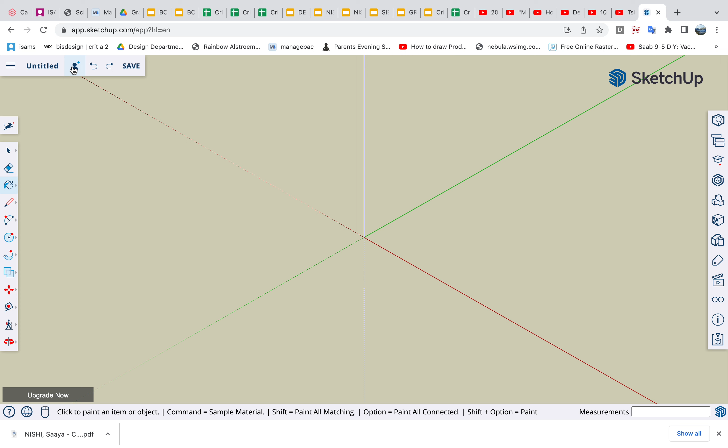Go for a simple, elegant bottle. A few tips: go to the top, and when you go to create new, make sure it's in millimeters.

Click on a line, this will help. Go up to the blue axis, and just type in the bottom. Go ahead and type straight away 2000. I know it's a massive bottle, but believe me, it will help you a bit later on.

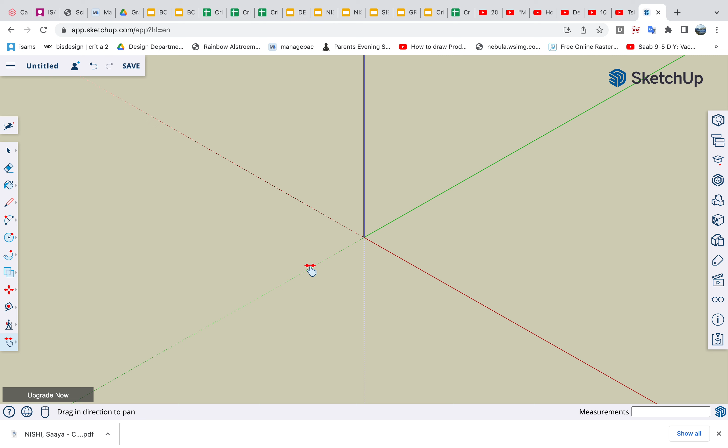So let's pan this down into the corner, and then we can see the top of the bottle. Nip over here, press escape, and change your views. I'm going to go for a fully isometric view, and look at the front.

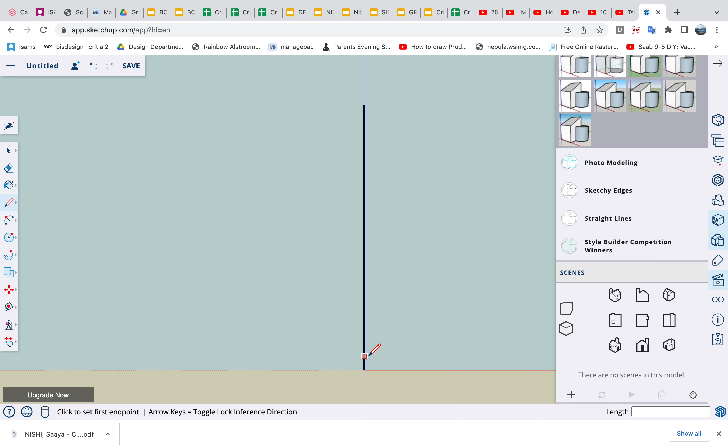So the horizon's at the bottom where the origin point is here. Go up to the top of the bottle, and you're just going to draw. I'm just going to draw a basic lid.

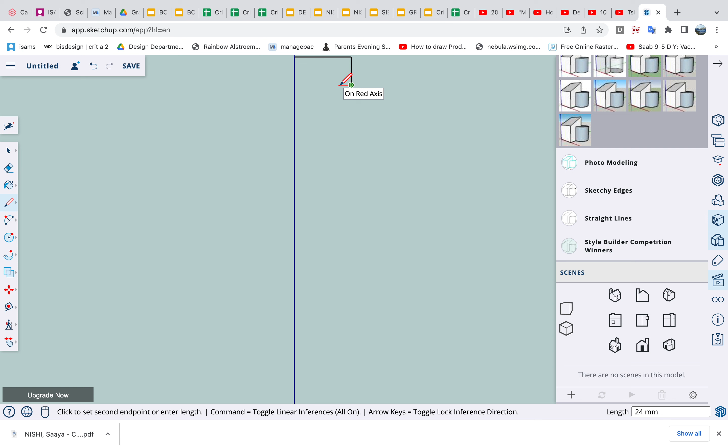You start to draw your design, but you have to think about things before you start. So I got the top of the lid, and I've got this simple screw-on lid that you find on many of these, and then underneath you can draw where the neck is, and then draw another line.

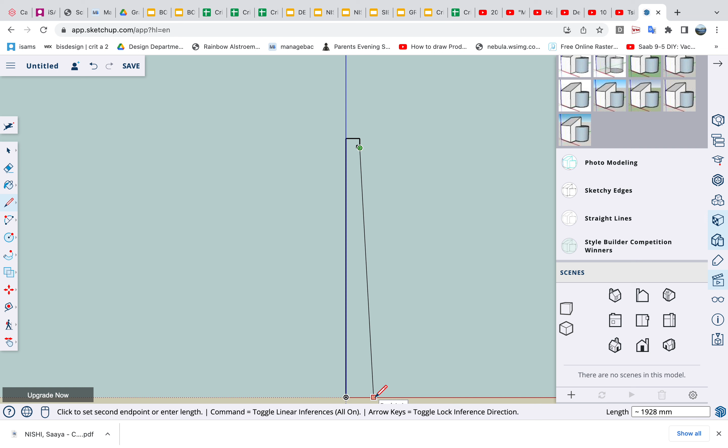I'm just literally going to go all the way down to the bottom, click on the origin, and then drag so that it says red axis. Just click on there, and then I've got this line, and then just fill it, click just there.

So I've got this profile that I want, but there's some problems with this. Use the pan, and then come to the top. Right, this is a sharp edge here, so get rid of it.

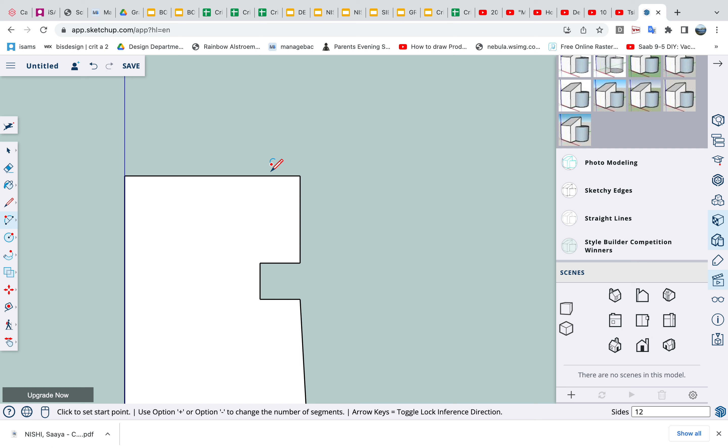Click the second one down, and then click on the edge, drag it to the edge until it turns pink. The line and the arc in the middle, it says tangent to edge, and then just click, and then click again, and that should have gone.

You could always use T for trim. Sorry, use the rubber tool and just take out that line there and there. It should have done it anyway.

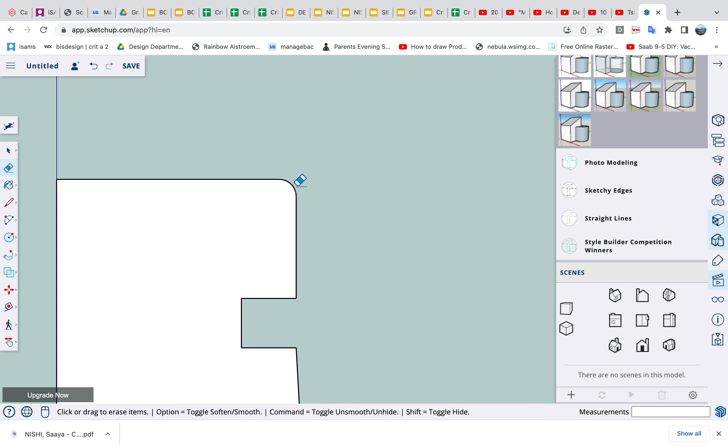And then use the same arc tool, and I might just put one. No, I'm not going to put one there. So I'm going to put one here. Click, click, and then double click. That's it, double click, and it trims it straight away.

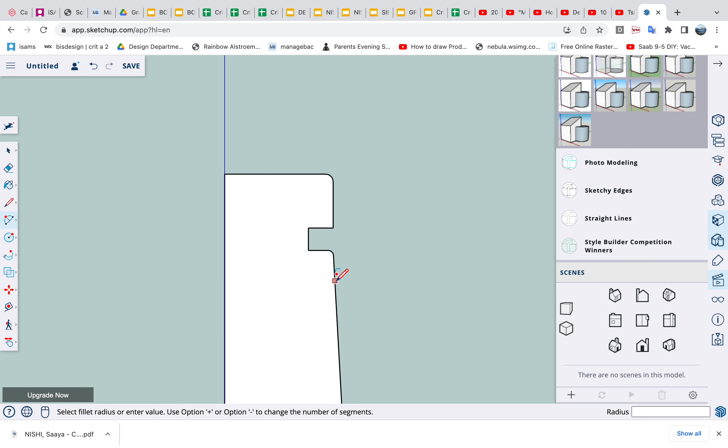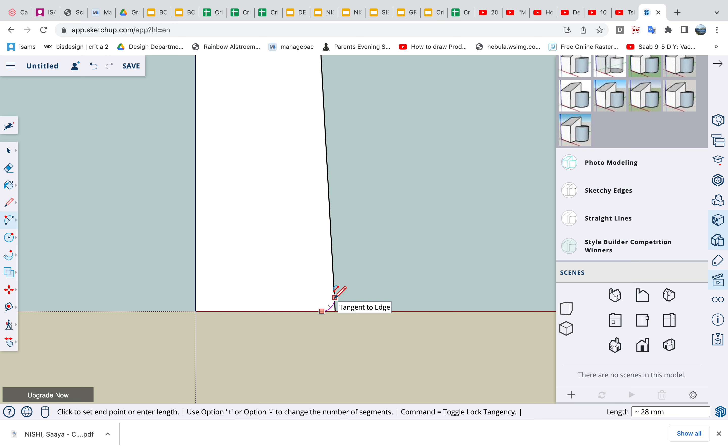The next bit is the bottom of the glass. And the bottom of the glass here, I need to do a nice radius on that edge as well. I'm trying to do this quick, under 5 minutes. So use the radius tool again. Click, click, double click, and it puts you a nice little edge radius on there.

So now I've got this really tall, skinny, slim bottle. It's probably a bit too tall, that's all right. So now what I need to do is, in order to make it round, I've got to use this tool here, offset. Click on this line and then just offset it.

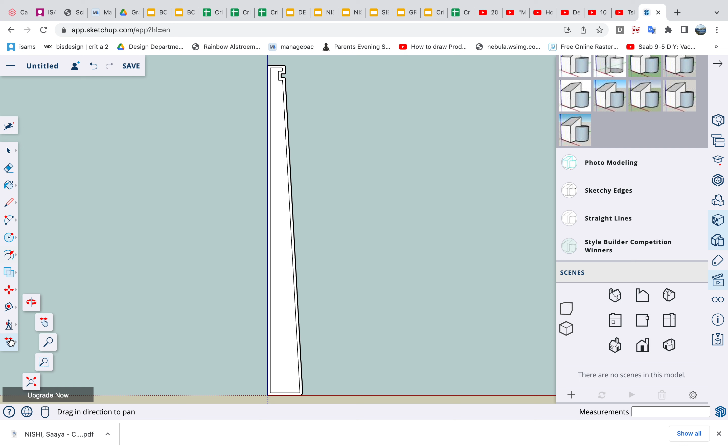Perfect. And then let's go pan and then zoom in at the bottom. So the best thing to do here is then use a line, and then we're going to put another one here.

I think this one works best, but we'll try that one there, and then zoom out.

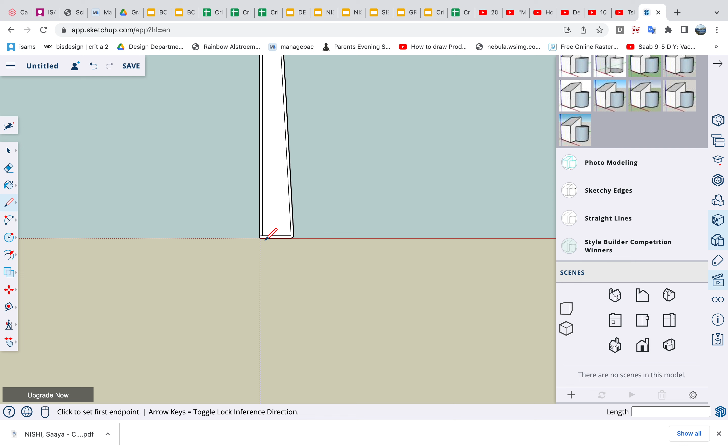And then go all the way to the top. Come on. Then zoom in, and then put another line, escape, and then put another line across there. And then use your erase tool to take out this line and this one. So it leaves you with the outside profile all the way around.

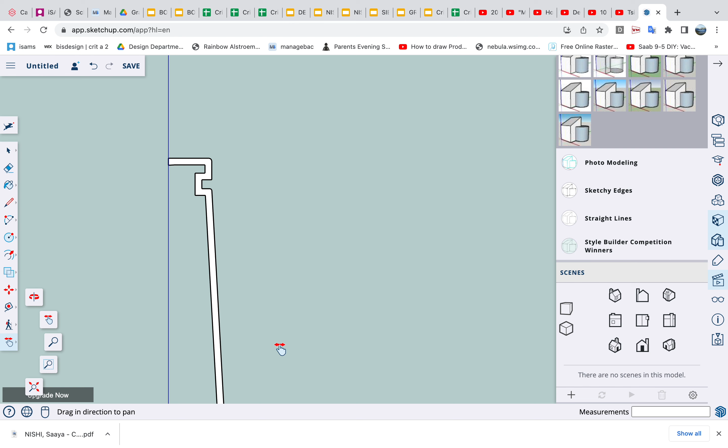See that? Good. Then press your home. So there we are, we're all home. And then just zoom out so that you've got this profile that goes all the way around.

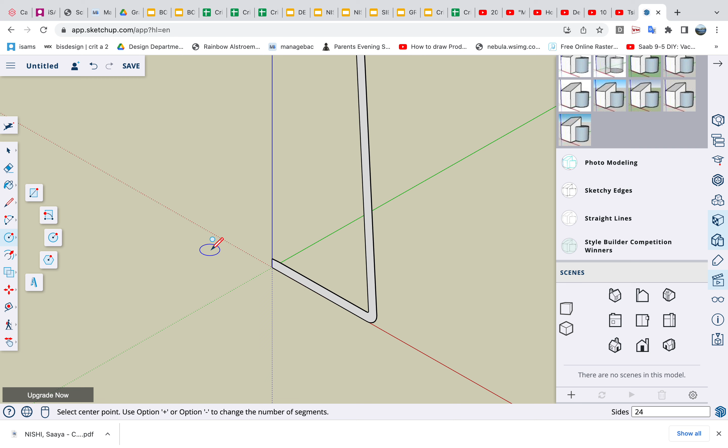Next thing to do is just to zoom into the bottom a little bit. And there you go, get that central. Hit circle, and then click on the blue axis. Make sure this starts on the blue. So click on the blue and then just pull that out.

Probably, I think that point there, that should be okay. Now it might go wrong, and you can correct it.

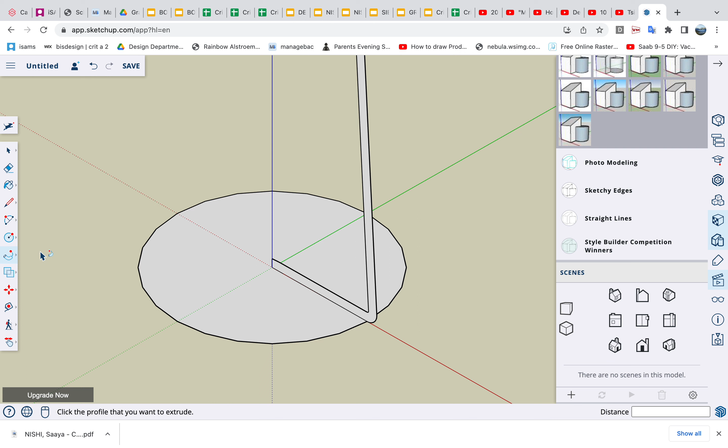So underneath here is the follow me tool. Click on follow me, click on this profile, and then actually click on the segment itself, and then just keep following the segment round. Hover the button all the way. Keep going.

Until you get all the way back here. Now this is the awkward bit. On the edge, click. Now I've done that slightly wrong because there's a line and there shouldn't be. So Command Z, if it gets a bit fiddly, go back the other way and let's just see what happens.

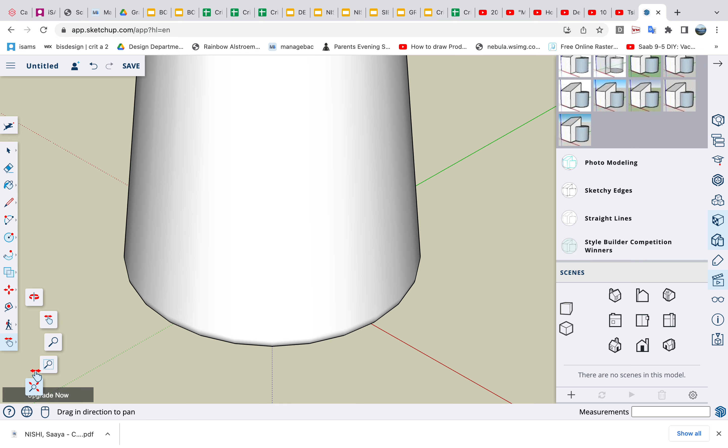Sometimes it gets a bit funny. Yay, there you go. And then what can happen is, depends on how it's working today, is underneath it can be hollow. Hooray! So let's try and fix that too.

C for circle. Click on the blue axis and then drag that out until you're on a point. Click, and then you can use P for push pull and just drag that up to the line there. Is that going to go up?

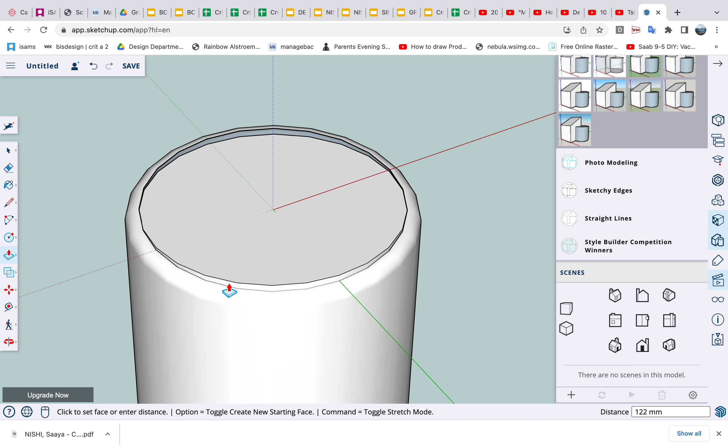No. So Command Z. Let's try that C for circle again. Circle from the center. Careful which point. Origin. There you go. Right on that edge.

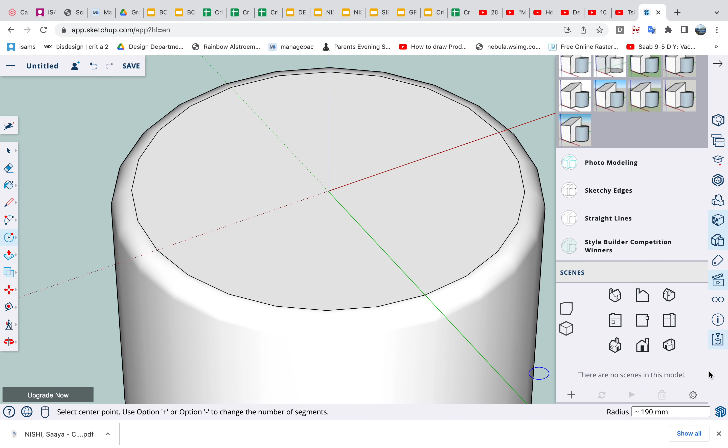Yeah, there you go. So that's now filled. So turn it over. And now, we've got this bottle shape. Okay, so let's just use the pan. Let's bring that one down. And in we go. So now we've got this quite sleek, slender bottle, posh bottle.

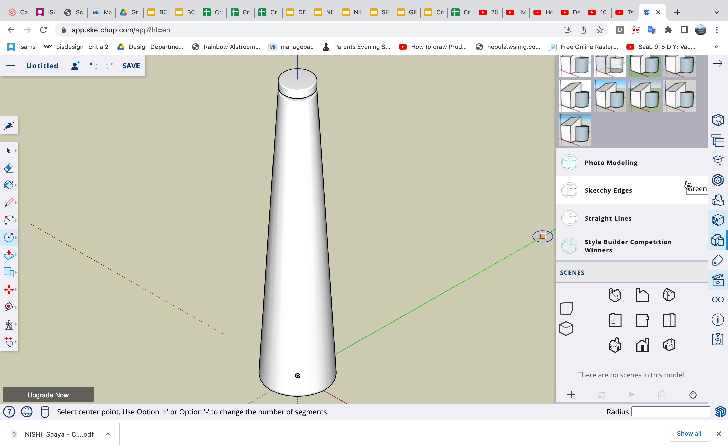Now, you would want to now give it some colour. So go to this palette here, and to get there, you'll be here. So go onto the search tool. So if I want to give this a nice light colour, I click on there and then drop that onto

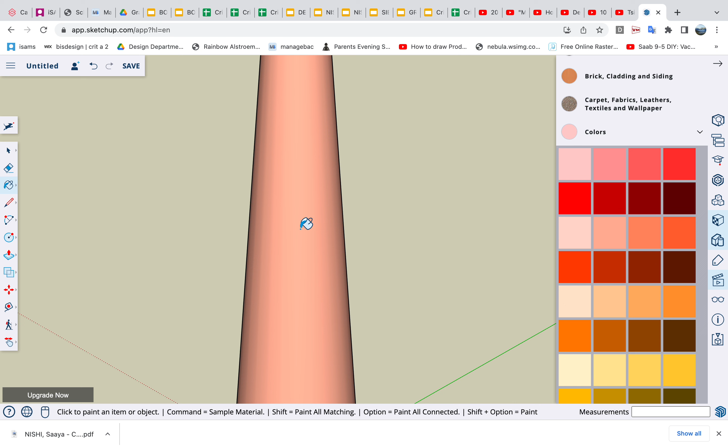the colour here. Now, if you want to give the top a slightly different colour, you're going to have to zoom in and then just use the pan and then zoom in. And then if you wanted to go for a different colour, let's say a much darker colour, then drop it onto here.

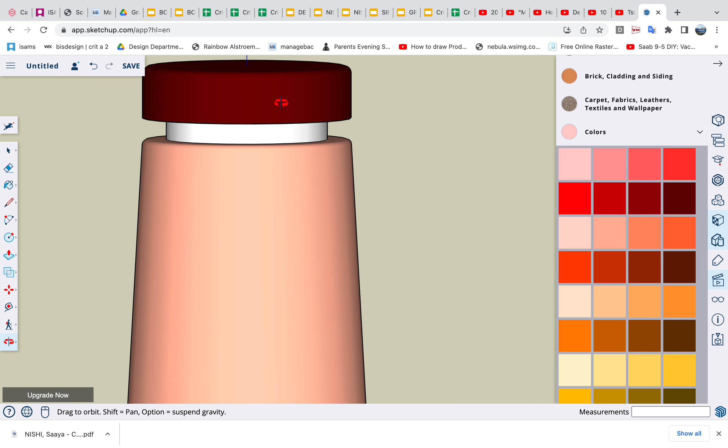And then what you want to do is you want to actually then turn that over, and you probably want to do it on the underneath as well. Escape and then drop it onto that underneath surface. Let's just leave that white, or let's just go for a different colour anyway. So we put it on the neck, a slightly different colour. There we go.

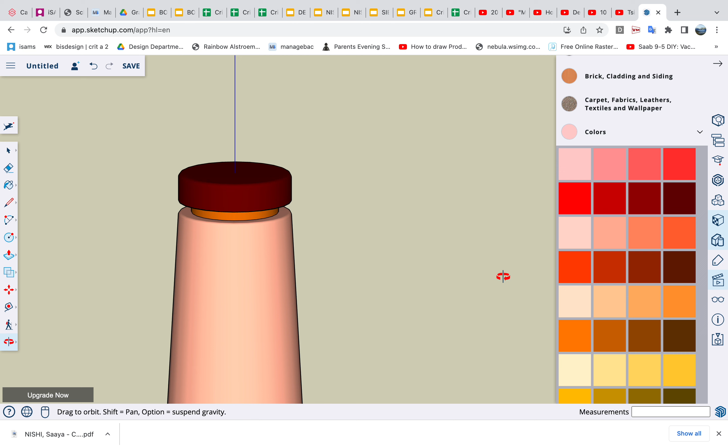So what to do next then? Well, we'd like to show it as see-through. It gives a better effect. So go to your clapperboard and we're going to put it back onto, where's that gone?

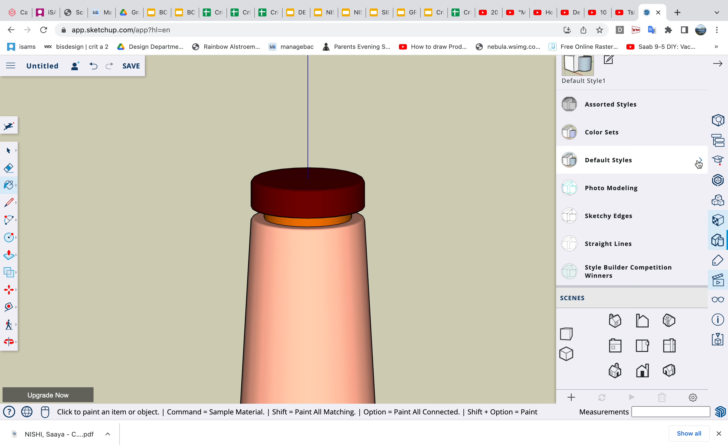We're going to put that back onto perspective. No, we're not. We'll leave it on there for a minute. Go to your default style. So go onto here, and then you've got this. I'll work that back for you because yours will be on home, and you can then go to search and then go to default styles and go for X-ray.

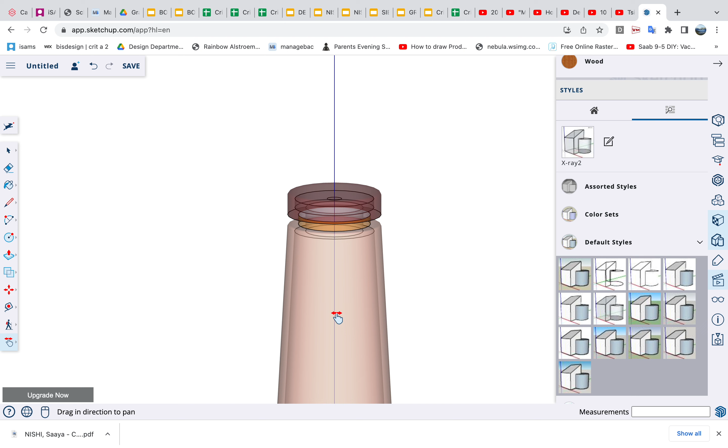So what that does is it makes the bottle look see-through. So just use your pan and you can see, look, bring that up, the whole bottle looks slightly see-through, okay, which is the kind of thing that we want.

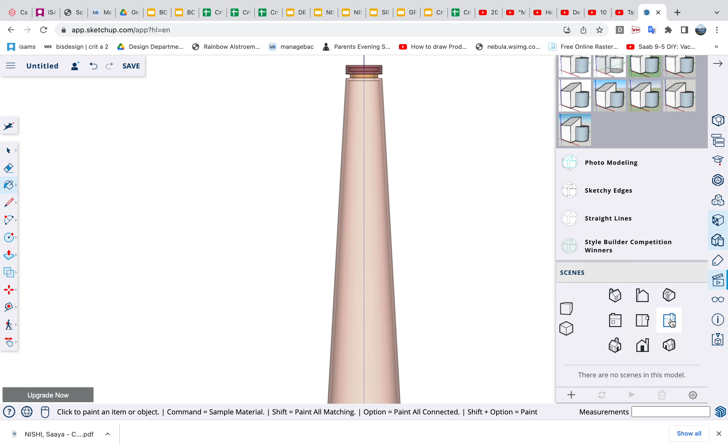So in the end you'll have a 3D view, and then you'll have a front view, then you'll have a side view, and then you'll have a plan view from the top. And this is where you can apply your logos, and I'll show you how to do these a bit later on. Hope that helps. Let me just put that back to normal.

Yay, just on that one. So that's how you do your basic bottle. And you can put it onto there if you want a better 3D view.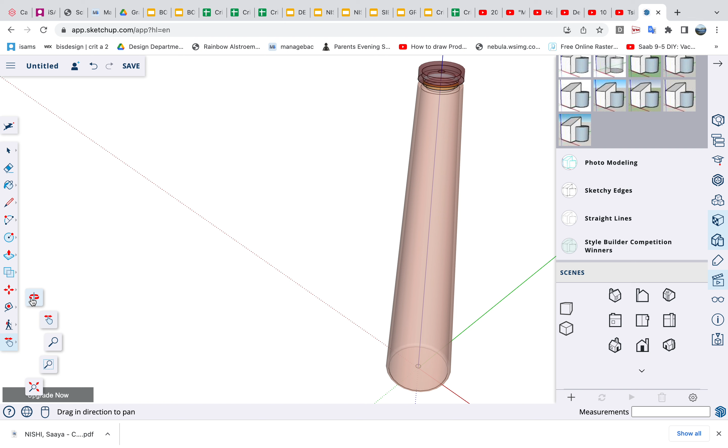And then you can use your pan just to bring that in. And then you can just have a look, and you can take screenshots from different angles as well. All right, so there's your basic way of how to make a bottle.